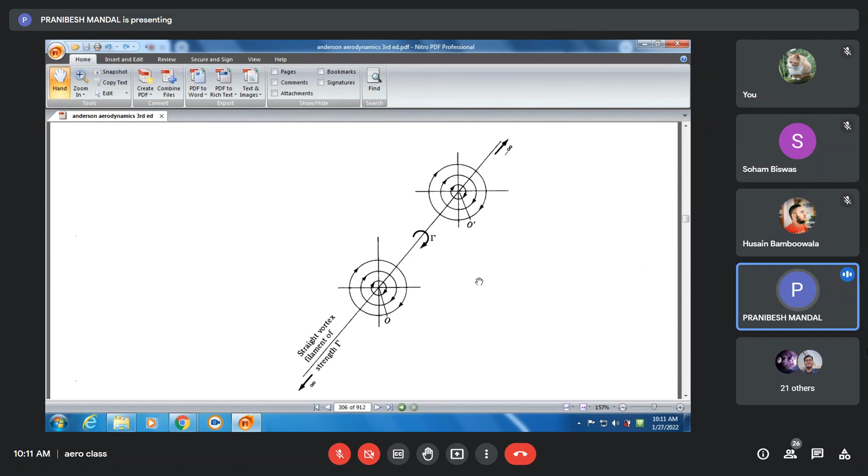Now, there was a typical question at the end that, sir, in the mathematical sense, we are saying it is inviscid fluid, but in experimental and practical sense, we know that without viscosity, such eddy generation cannot occur at the end of the curved surface, right? Yes, sir. So in a sense of practicality, what we are saying is that for an aerofoil like this curved surface, the upper surface is having a separation. That is why at the end there is eddy generation, right?

Yes, sir. And from our perspective of streamline, we noted it in another way, that the lower surface streamline is required to bend like this. That is why this eddy generation, right? Yes, sir. In a sense, if I admit both things, mathematically and in streamline perspective this is the case, and in practical perspective, due to viscosity, such boundary layer formation occurs and such separation occurs. Separation is also a streamline theory kind of thing. What happens is actually reversal of velocity from zero to negativity, yes or no? That I actually told you at the onset of that discussion.

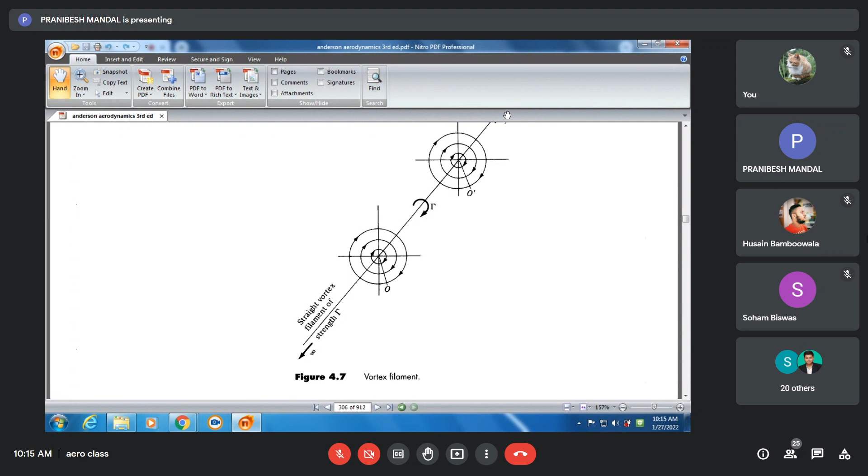Now let us get to this particular theory of aerofoil. First of all, the circulation on an aerofoil can be thought of as a series of small circulations along the aerofoil surface. Got it or not? So please repeat the last part, sir. The total circulation on an aerofoil can be thought of as a combination of a series of circulations...

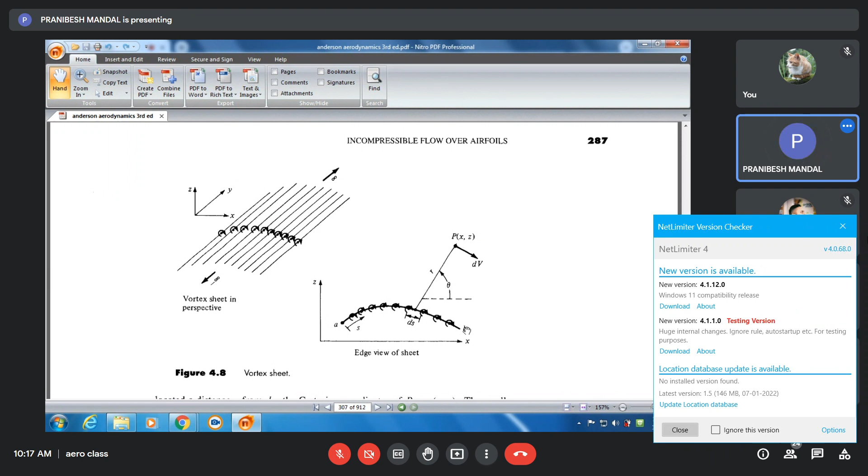Am I audible? Yes, sir. Okay, sorry, my connection got disrupted for a moment. What I was telling is that the total circulation on the aerofoil surface can be thought of as a series of small circulations along the aerofoil surface. Combination of all these small circulations will give the total circulation. Got my point? Yes, sir. That is understood, sir. But you said something about the strength also. How can we determine the strength of the small vortex? Coming back to that particular thing.

And as now we are all thinking about the 2D phenomena, so we make it in this way, that in the span direction, that particular thing is actually up to infinity. So that is a cylindrical kind of thing. Anyway, that is not very important. So we can actually take small 2D circulations which are along the surface of the aerofoil. Okay.

Yes, sir. And all these small circulations are actually combining to have a total circulation around the aerofoil. Can we think in this way? Yes or no? Yes, sir.

So from there comes a theory. Mind it, it's a very important theory as far as aerofoil characteristics are concerned, and that is called the thin aerofoil theory. What is thin aerofoil theory? I'm showing you the cross section of aerofoil again and explaining it. How an aerofoil looks like - it had an upper surface, a lower surface, a particular thickness, and a camber, right? Yes, sir.

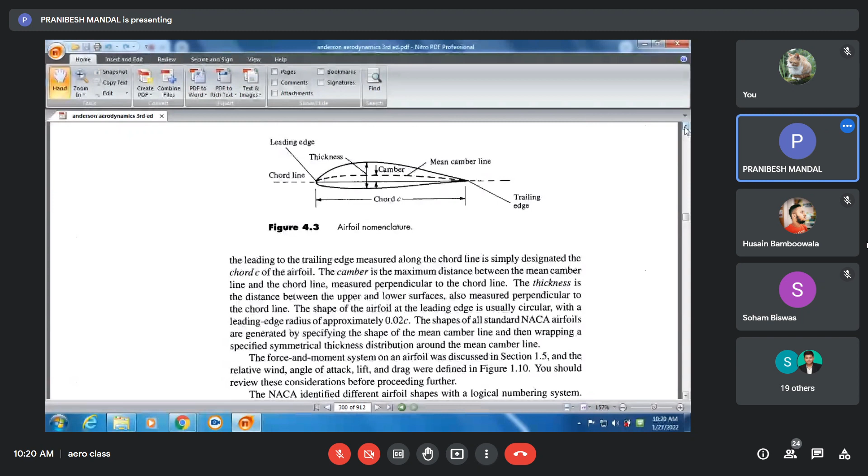Now what do you think - if I actually go on lowering the thickness, just lowering the thickness, then at one point this particular aerofoil will become a small strip along the camber, yes or no? Yes, sir. Correct.

So we say that we can take the mathematical analogy of any aerofoil as a very thin aerofoil along its camber. Understood, right? Yes, sir.

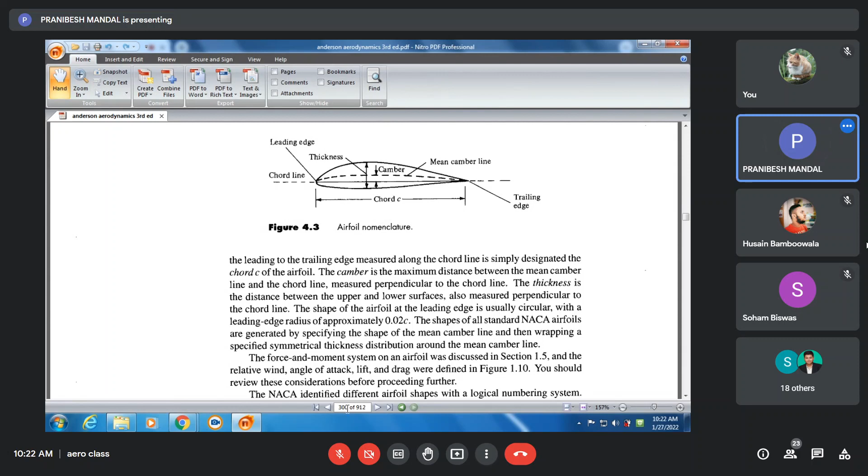Because if I take only the upper surface or only the lower surface, that cannot represent the aerofoil at all, because the asymmetry in the aerofoil is a very important criteria, right? Yes, sir. And that is why we take a very thin aerofoil along the camber line and say that it represents this particular aerofoil. Got it? Yes, sir, that is more or less relevant in order to represent this aerofoil. So we are taking a very thin aerofoil along the camber line, okay?

And as already specified, in the span direction they are infinite, so we are not considering that particular direction - we are only considering this plane.

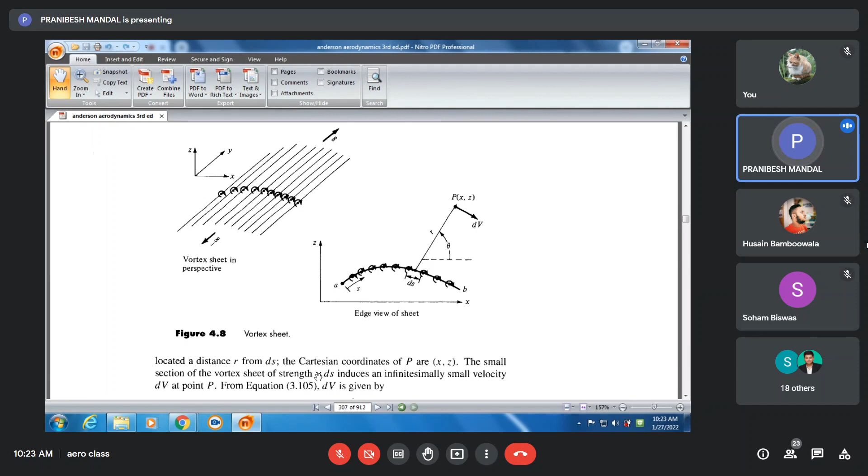And we are considering that there are very small vortices of strength small gamma per unit length. You need to understand this well. The strength of the vortex per unit length is small gamma. Got it or not? The total strength is capital gamma, but small gamma is the strength of the vortex per unit length. Got it?

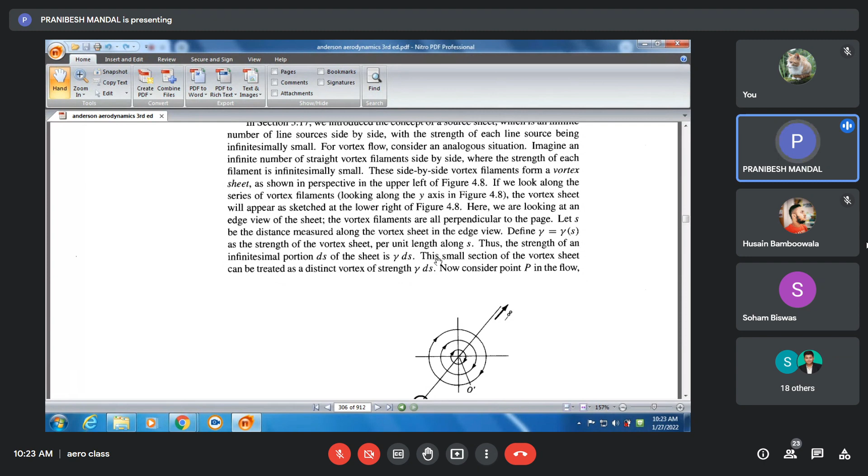Yes, sir. So again, calculus will come to help us. For a very small portion ds, the total strength will be gamma into ds, right? Yes, sir.

Now if I say that this small portion of the total vortex, that is gamma into ds, is inducing a very small velocity dv at a point p, which is a distance r from this particular section, I can say...

Yes, sir... I'm not able to understand it. Yes, sir. We can say that.

And what will be that particular velocity? As we know, the velocity induced in the tangential direction at any point is given by gamma by 2 pi r, right? Correct. Yes, sir. In the negative sense - and the negative sense is alright because that's not a problem, it's only giving the direction. I have no problem with it.

So ultimately, as the total strength is small gamma into ds, this dv will be small gamma ds by 2 pi r. This is common, and be sincere that this is dv because it is induced by this very small portion of the vortex. Nothing from the other side has had any effect on it until now - only this portion has induced this dv.

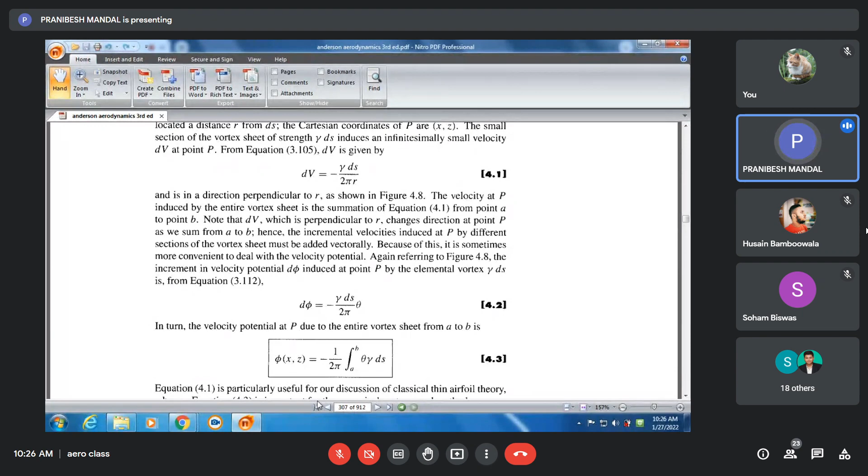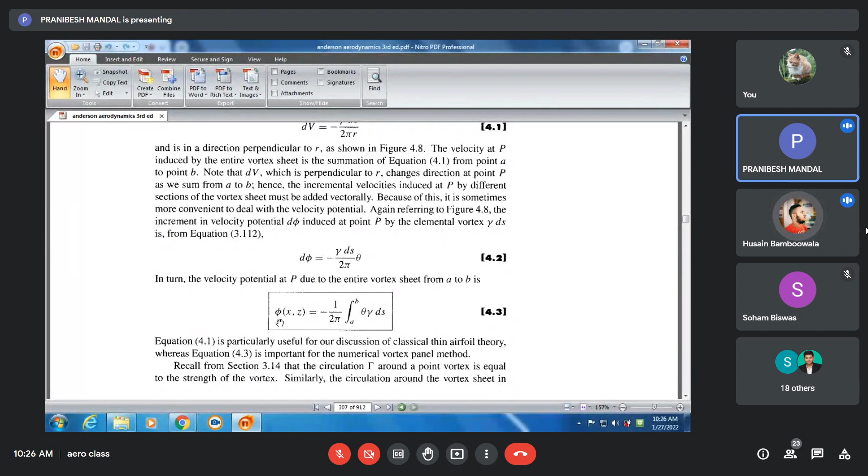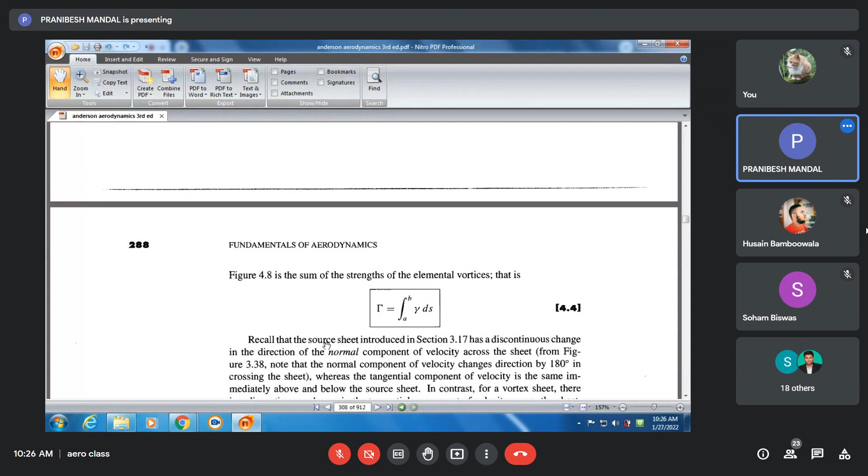Now you may tell me, sir, how can we do this particular integration? Obviously, if you are provided the geometry of this camber line and all these things, you can carry on the integration; otherwise not. But still, in this way, we can find the phi of this particular flow, right? Yes, sir. Anyway, now forget about phi, come back to v. What is the total gamma? That is obviously the integration of gamma ds from the leading edge to the trailing edge. Yes, this is very much obvious.

Correct. Now see this particular thing - we are taking gamma as its definition. First of all, let us take a closed path or a contour around this particular aerofoil strip. We can take it.

Yes, sir. We are taking this very small length ds. Obviously, you can ask me, sir, if the curved line is ds, how can this be ds? As this is a very small portion, the curvature we may omit, and we can say that the horizontal length is also more or less ds.

Yes, sir. And we take a very small normal length dn. Sir, if we say ds, due to the very less curvature, can be taken as a straight line, why will there be a variation in velocity u1 and u2? In that case it will be same. Wait, u1 and u2 are at dn. We are taking a normal small length also, and that is why we are considering that here the velocity is u1 and here is u2.

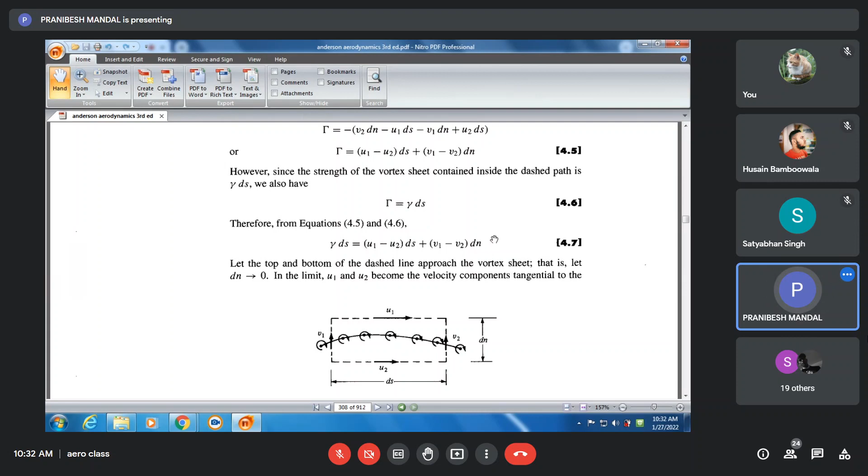Now you tell me that in the limit dn tends to 0, U1 and U2 become the velocity components in the upper and lower surface of this very thin aerofoil. Yes or no? Correct. Yes, sir. So if dn is tending to 0, what is the value of gamma? U1 minus U2. Yes, sir.

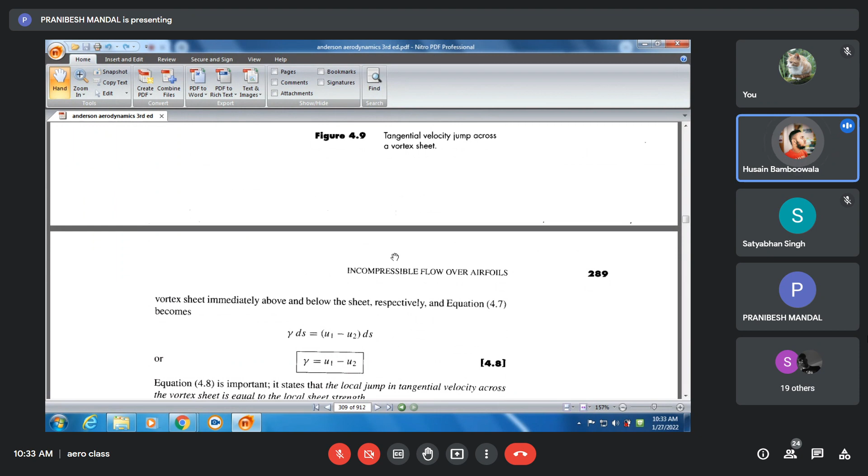Now see guys, so the small gamma is actually given by U1 minus U2. Does it say anything? Sir, the difference in velocity is basically the reason for circulation. So it is the difference in tangential velocity from lower and upper surface, right? Yes, sir.

Now, this is not given in the text. You just questioned me, that is why I am answering. Now forget about this small strip. It is correct now that the difference in velocity in the tangential direction, like U2 and U1, they give this small gamma.

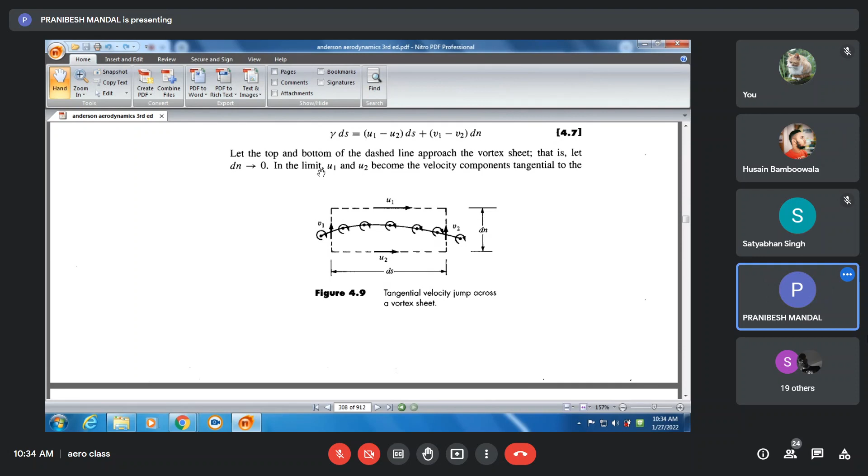Correct. Yes, sir. Think about viscosity now, how a viscous fluid is actually behaving. On the surface velocity is 0, then velocity is increasing, yes or no? Correct, sir. So there are differences in tangential velocities from one layer to another. Yes, sir, exactly. And what we are seeing is that it can be given by the local circulation per unit length, yes or no? Yes, sir. So got this analogy?

Over there, it was just for a layer without specifying the thickness. Here we have given the thickness. Can you repeat? The last thing was not coming very clearly. In that case where we were considering the boundary layer flow, we had only one surface, so we did not consider the thickness of that surface. But here, that is absolutely true.

But even if we think of that, see, here we are considering an aerofoil surface, right? Even if we didn't consider it, if we would have considered only this contour over an aerofoil surface, would it make any difference? Tell me. Has this particular aerofoil surface come into picture in any way in this analysis? I can take this contour anywhere, na?

Anywhere. That will again be equal to gamma ds. So again, our derived result is u1 minus u2 is equal to gamma. But the thing is, sir, how do we assume that with respect to ds, u1 and u2 do not change? With respect to the tangential direction, means with respect to the ds direction, the u1 and u2 do change.

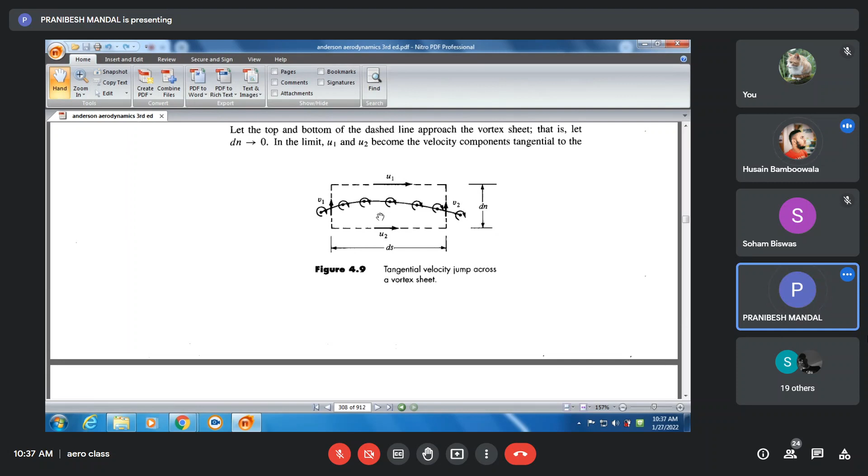And if we think the small aerofoil is there, this small gamma is actually telling the difference of velocity between the upper surface and lower surface. Yes or no? Yes, sir. So got the small gamma analogy with respect to vorticity as well as with respect to small aerofoil theory. Yes, sir. Okay, fine.

So again, one thing I got confused, sir. In the previous day, before closing, you had shown a diagram where on one side the end of the aerofoil was a triangle pattern and the other side it was a sleek pattern.

Coming, guys, coming to that only. You need not worry. See, here the aerofoil approximation is shown that we are considering a very thin aerofoil and we are taking the vortex sheet on the camber line like this. Anyway, I am coming to that particular thing only.

So for the trailing edge, first of all, let us consider the camber trailing edge only. We are seeing that the upper and lower surface velocity should be equal, right? Yes, sir. So where we conclude is that the local gamma at the trailing edge should be 0. Correct.

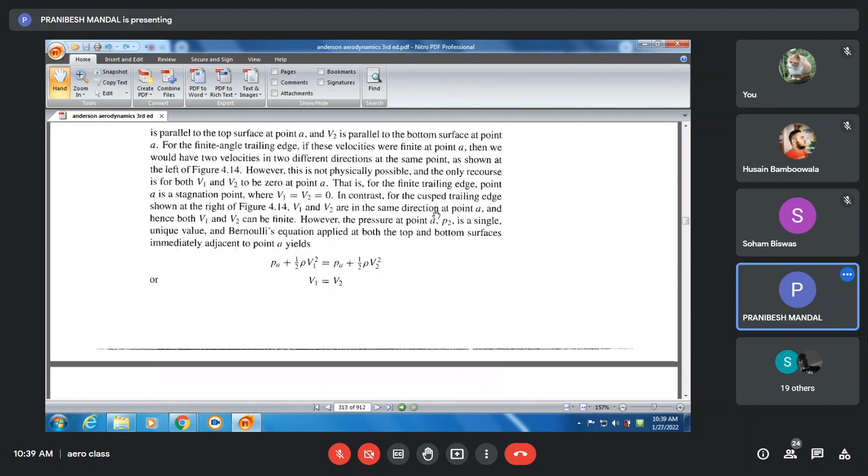If the trailing edge angle is finite, then that should be a stagnation point, as I told you, because the two streamlines cannot cut one another. Yes, sir. And if that is cut, there V1 is equal to V2. So the last two can be combined. What we say, the Kutta condition in, wait, I think you know that.

These three particular conditions are summarized and called the Kutta condition, because this particular thing was actually observed by the scientist Kutta, our very well known Runge-Kutta, the same Kutta. Okay.

And this, my particular question, bolo? So my question over there was, if at the trailing edge the local circulation is zero, then how do we get, recollecting the previous day's thing, like flow over a cylinder and then extending it to aerofoil? So then how will we get those starting vortex and everything?

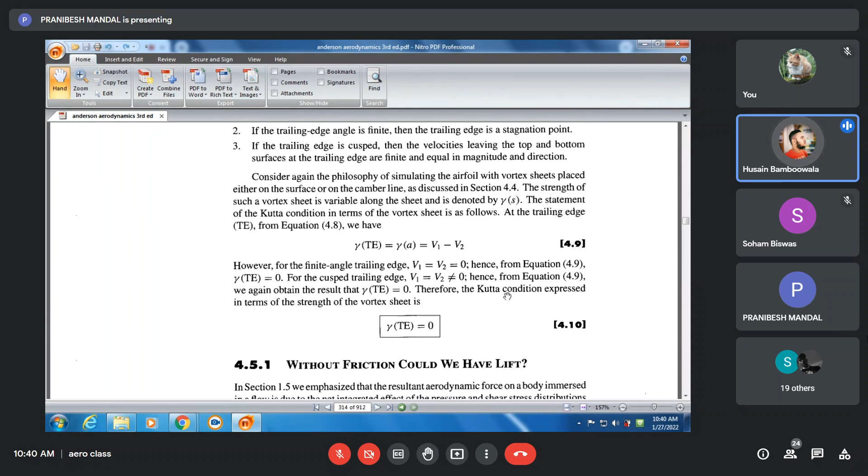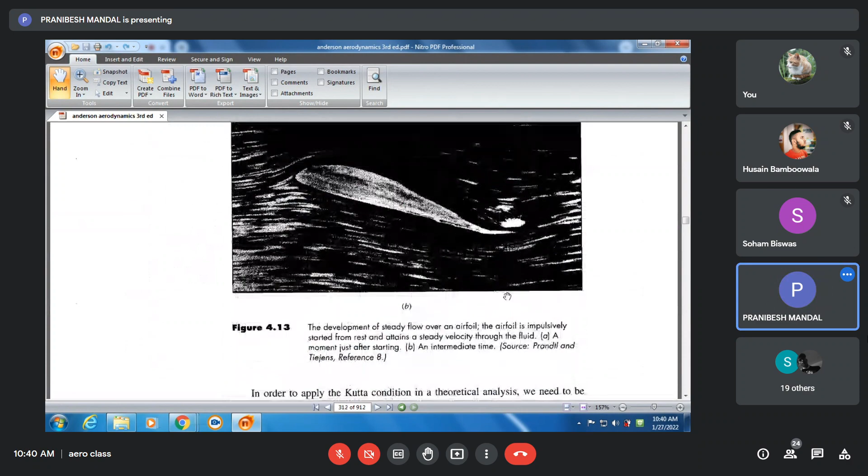So this particular condition V1 equal to V2, that can be taken in a way that gamma at this trailing edge is 0. Is it clear to all? Can you repeat once more?

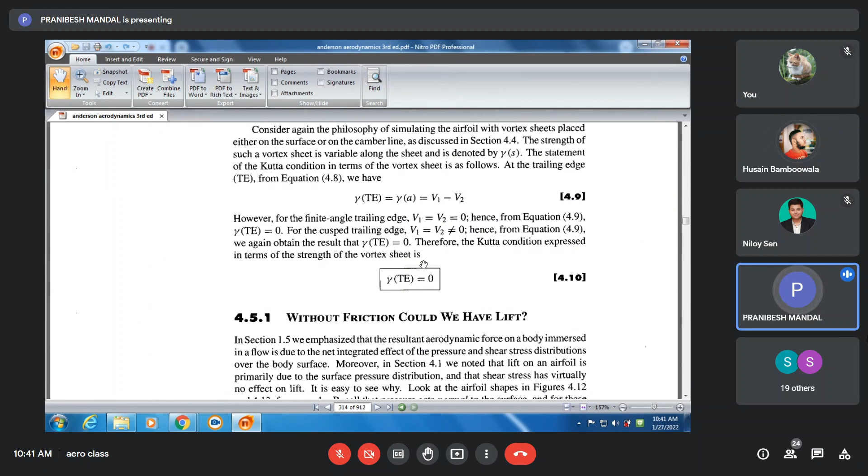I mean, if V1 equal to V2 equal to 0, then the velocity in the upper and lower surfaces are 0, and that is why the gamma at trailing edge is 0. Correct. Is this clear to all, yes or no? Yes, yes, sir. Okay, fine. Now I am coming to your point.

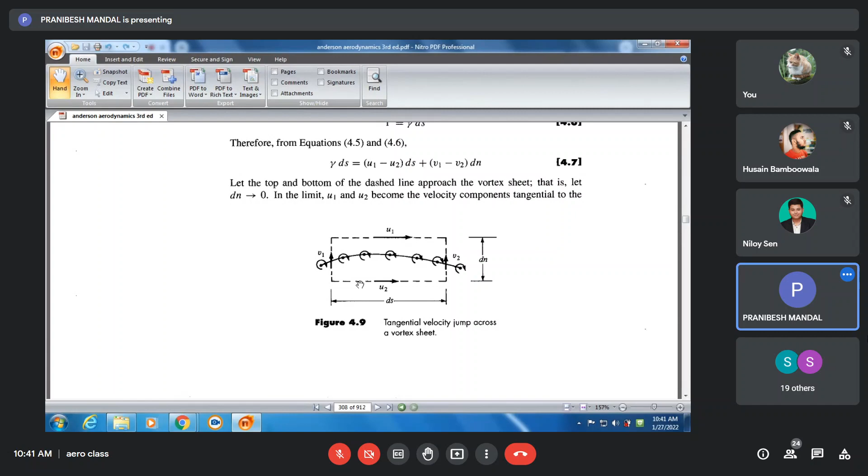You see, we have taken a vortex sheet, right? For this particular integration, a boundary condition, isn't it? We have taken gamma ds from A to B, right? And the boundary condition is telling that at point B, gamma is 0.

Got it? You need boundary condition in order to resolve it. Yes or no? And that boundary condition is giving gamma trailing edge is 0. There is no problem in it.

We have taken gamma along this particular A to B. That never says that at the end it cannot be 0. We have not told that this gamma is not changing from here to here. That is why I have taken a gamma at this particular local point. That is a variable ultimately, isn't it?

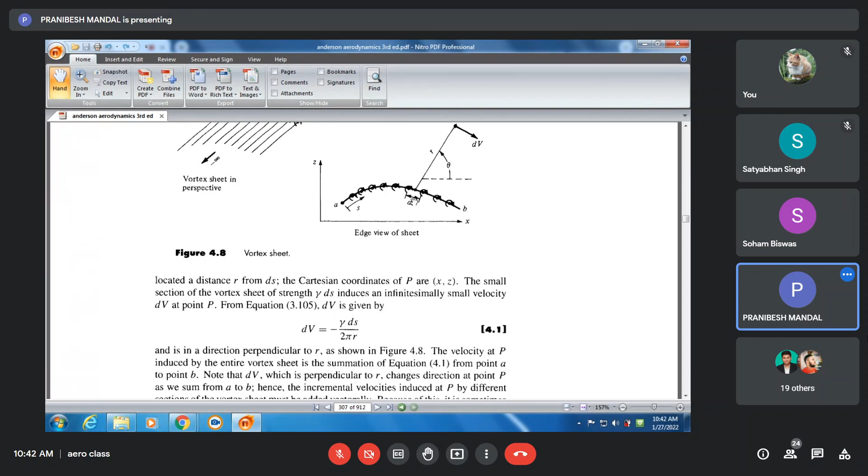Okay, so can I proceed further to the small aerofoil theory or thin aerofoil theory? We can.

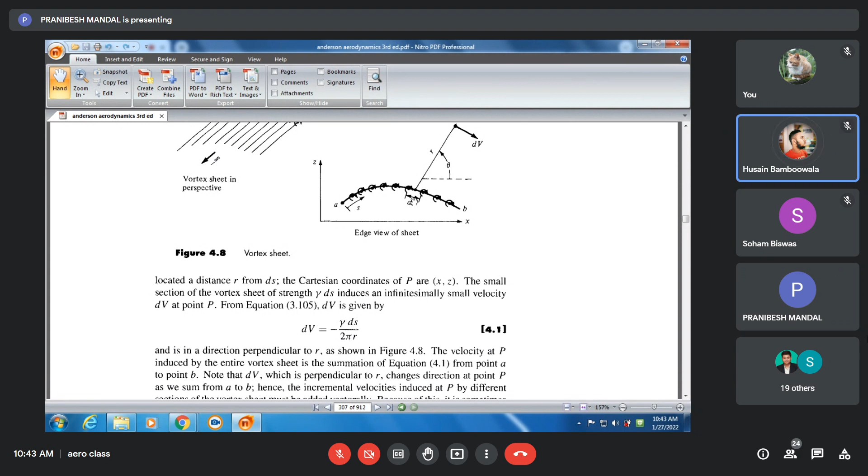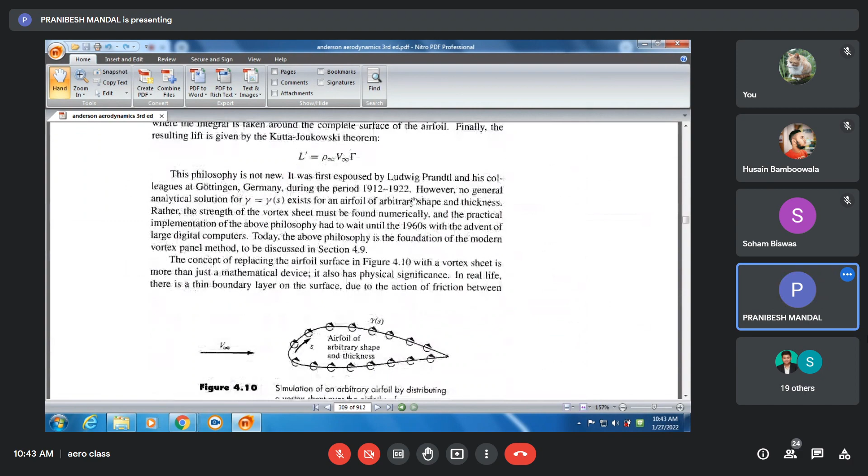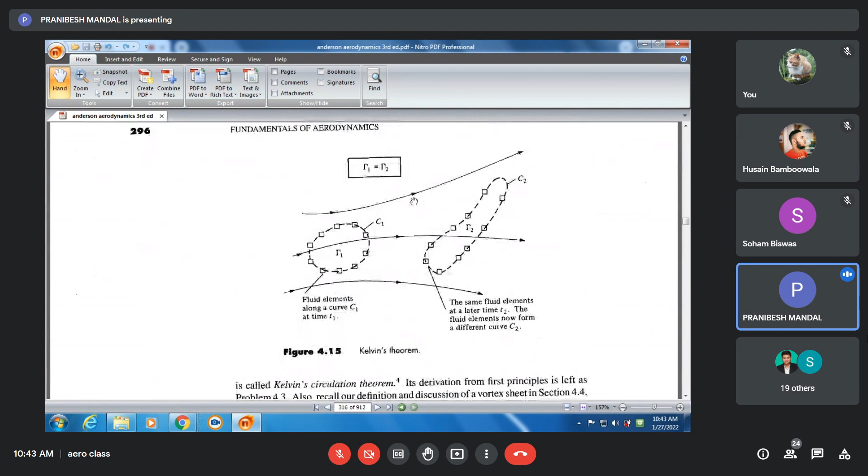So the classical thin aerofoil theory, we start with a symmetric aerofoil at the onset. And our conditions are that gamma trailing edge is 0. And also, now the camber line is the chord line, yes or no? Correct.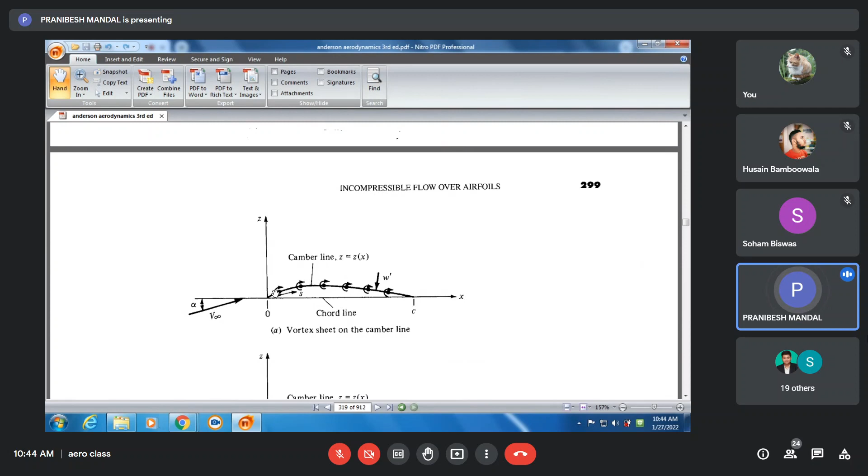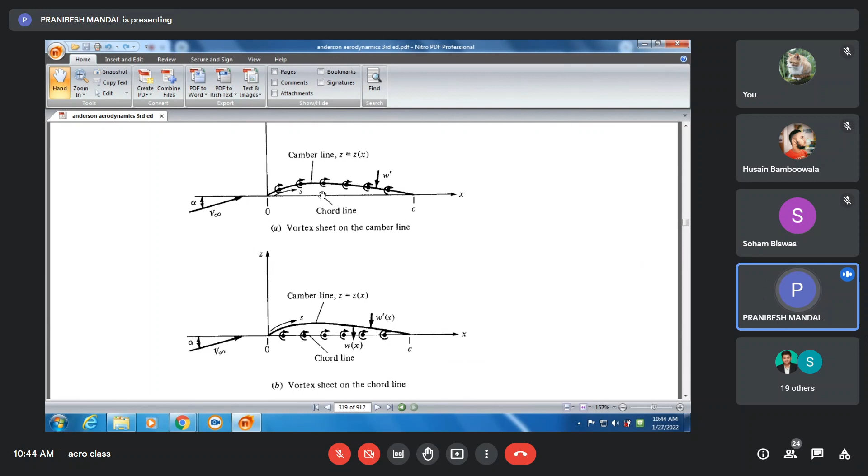So, at first we start with the camber line and we consider all the particular things are on the camber line. Then we consider that for symmetric aerofoil, or for an aerofoil with a very small asymmetry, the camber line and chord line are almost equal, right? So we can think of this particular vortex sheet is on the chord line instead of the camber line as well.

Okay, fine. So there is one V infinity at an angle of attack of alpha, and we are considering a vortex sheet of gamma ds along the camber line, which is or will be assumed as on the chord line in case of further analysis.

Now see, can we say that the upper surface and lower surface both are streamlines? Yes or no? Because now the flow is smoothly entering the aerofoil and smoothly leaving the aerofoil, so the upper and lower surface are both the streamlines.

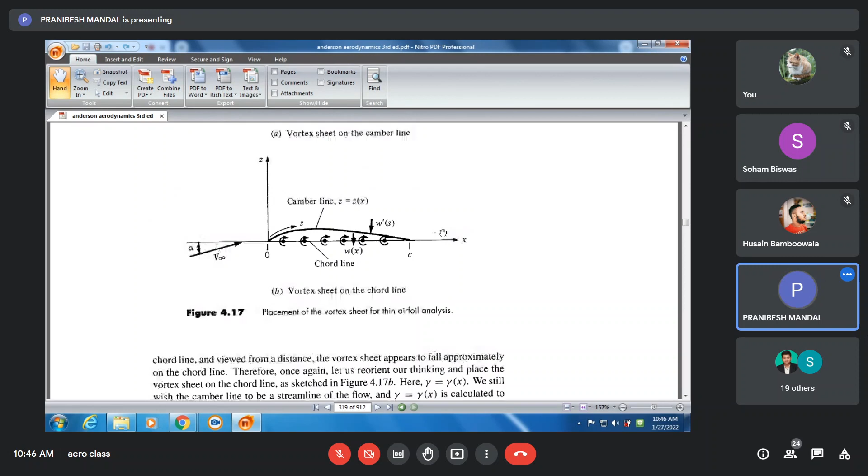And across the streamline, can we have any velocity? Normal to the streamline, the velocity is zero, right? So if normal to the streamline, the velocity is zero, then we can say that how many velocities are there, guys? One is the component of V infinity, and the other is the velocity induced by this particular vortex flow. Yes or no?

So what is the velocity induced by the vortex flow? That we consider W dash.

Sir, but why is W dash pointing towards the normal position in the first diagram? W dash is not always like this. W dash can be this, but there is one component of W dash here also. Yes or no? But that has to be zero then.

Please continue. So basically, we are taking circulation as gamma is equal to u1 minus u2. So both have the direction along the tangential direction for a very thin... that arrow is all right. But if we consider the vortex here, this will have a W dash here. Yes or no?

You are considering from here. I am considering from here. These will have a W dash here or not? Yes, sir, it will. Convinced?

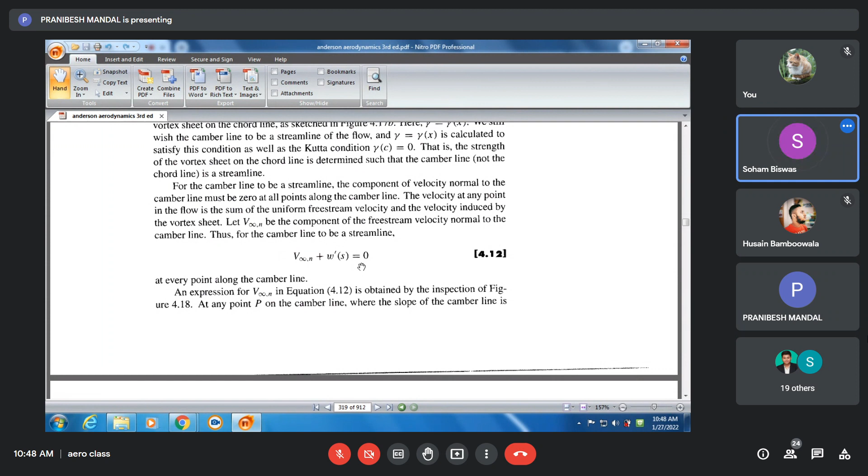We are just having a component of V infinity along the normal direction, that is my V infinity n, right? And the normal direction will depend on the contour of the camber line. Yes or no? Correct, sir.

Okay, fine. So as per the contour of the camber line, if we consider it is point P, the corresponding slant slope is tan inverse dz dx, where z and x are these two particular directions. Obviously this dz dx will be provided to you. No problem in that.

But this is the slope, right? So what is the total angle, alpha plus tan inverse dz dx, with V infinity? The total angle is alpha plus tan inverse dz dx, yes or no? Correct, sir.

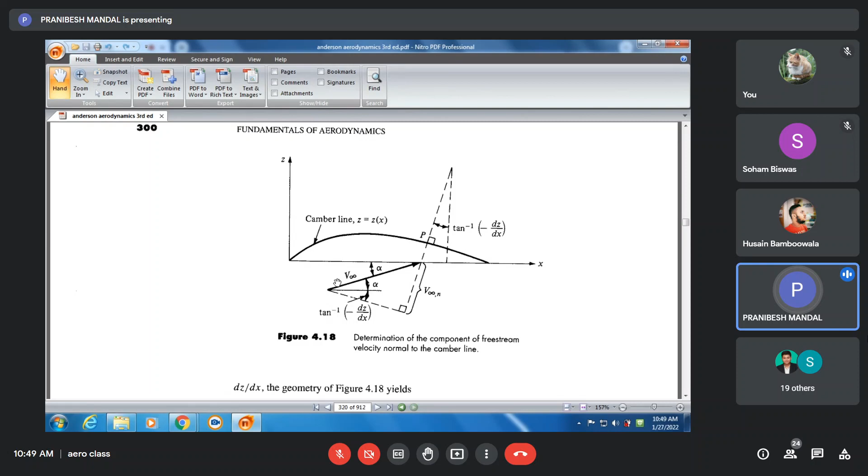So V infinity n will be given by V infinity sine of this angle. Yes, sir. Understood, sir.

Sir, you are not audible, sir.

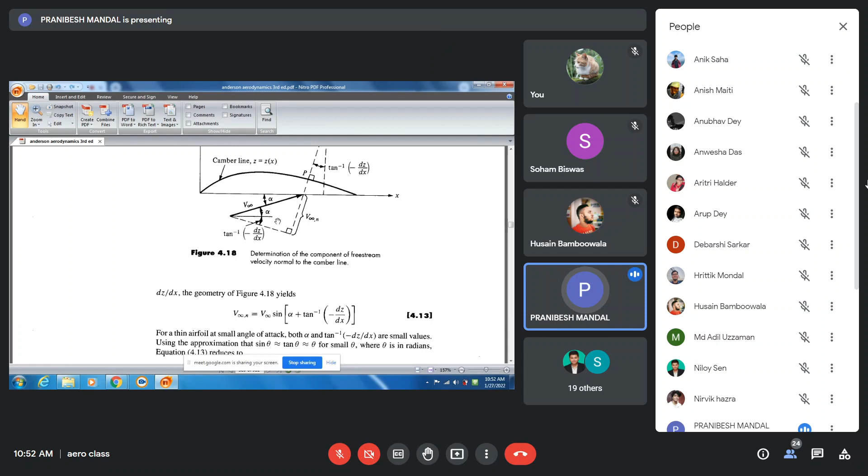For small angles, tan theta is almost equal to theta, right? Correct, sir. And also if we consider that we are considering only small angle of attack, that I will explain, but right now it is correct that the corresponding main position of this particular flight is nearly 3 to 4 degree angle of attack. So up to 4 degree also we can say sine theta is almost equal to theta.

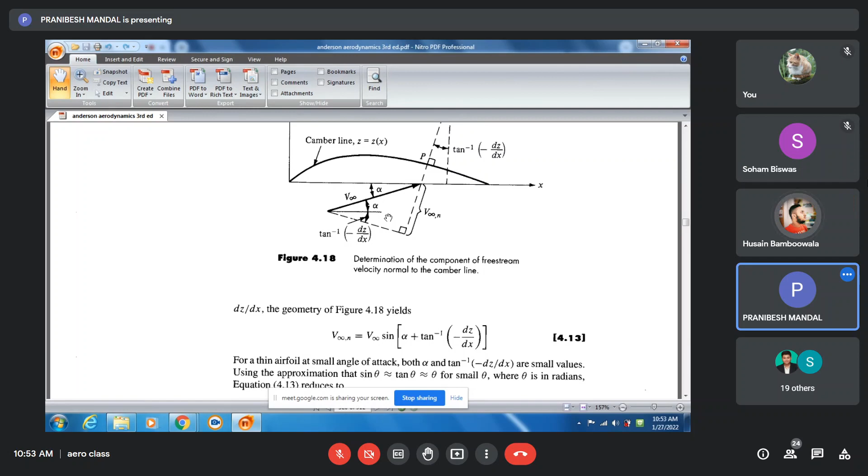We have not come to the extent of flight dynamics yet, that is why it is not totally clear. But still, so if tan theta is theta and sin theta is also theta, then this particular thing is simplified to this, yes or no? Yes, sir.

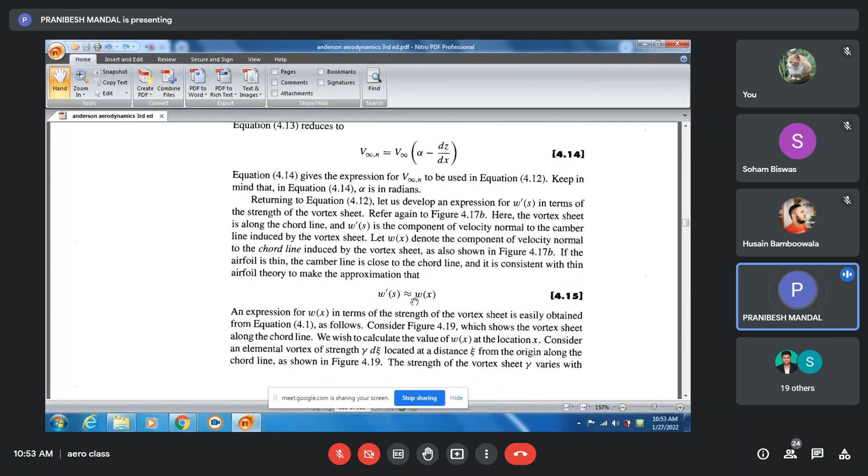So V infinity n is there. Now we must consider this W dash S, which for the case of chord line comes to Wx, right? For symmetric aerofoil, as I told you, this particular thing will come to here, yes or no? Yes, sir.

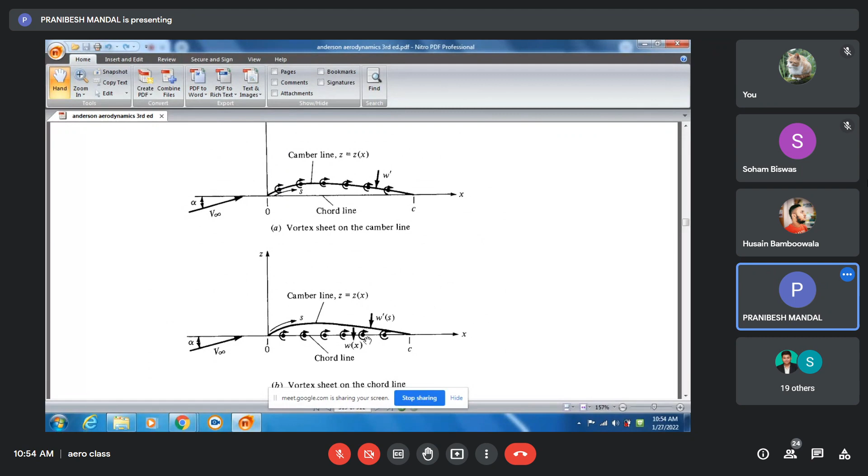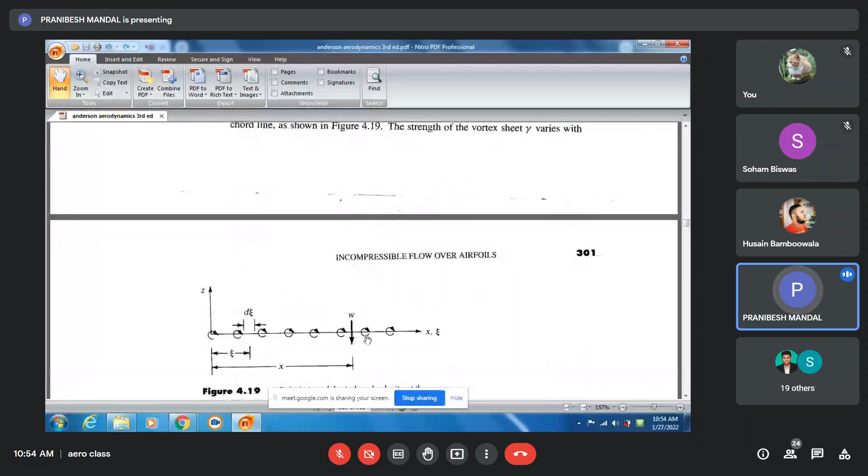5 minutes left, I am trying my best. What is this Wx? As you have already told, sir, W cannot be induced from this part only, this should be induced from this part, right? Correct. So we are having two variables, both in the same x direction: one is for the gamma and one is for the position of W.

So we consider a very small d xi that is equivalent to dx, but just in case we cannot actually make this particular thing induce W here. So we are considering this particular small circulation gamma d xi. Gamma d xi is inducing this W, okay?

Yes, sir. So what is this W? Same as gamma by 2 pi r. What is your gamma? Gamma is gamma d xi. And what is the distance r? That is x minus xi. Right or wrong? Yes, sir, right sir.

So the dW is given in this way, I can say. Yes, sir, we can, very good.

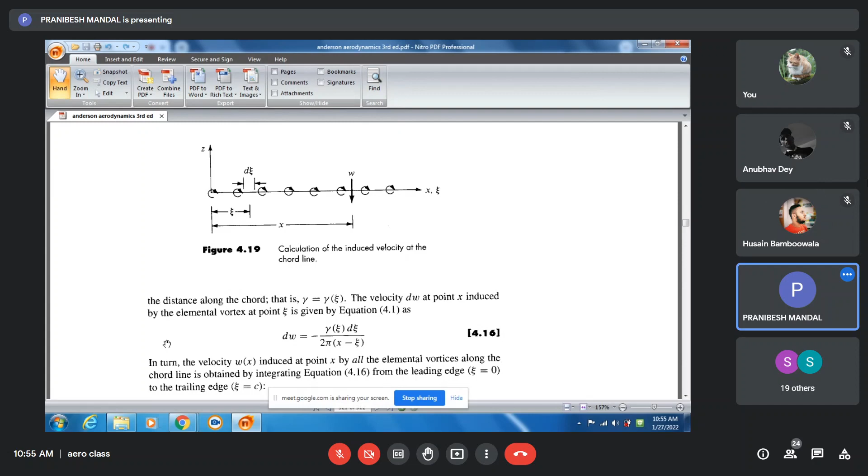So what is the total W? We must integrate it from 0 to C. Yes, sir.

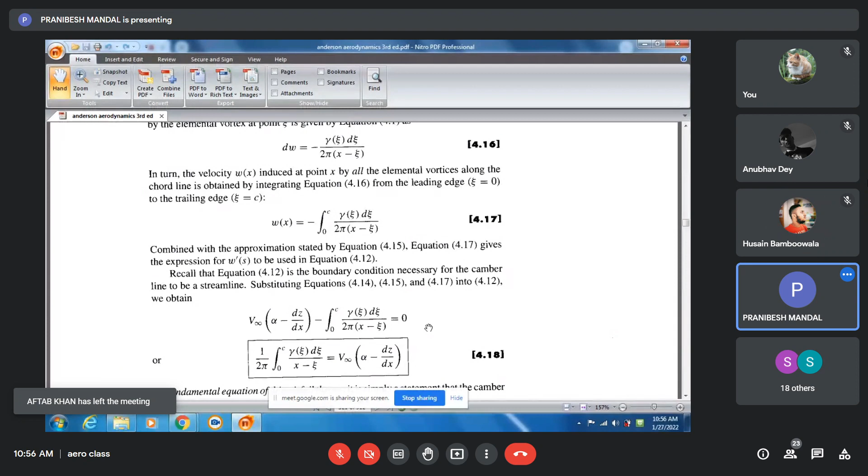Now the main question is how to get this particular integration done. Otherwise, as per our streamline theory, V infinity n plus Wx should be equal to 0. So what was our V infinity n? And this is our Wx. If we sum, that should be equal to 0, right? Yes, sir. And this we call the fundamental equation of thin aerofoil theory.

4 minutes left, should we go to solve it today or leave it? No, sir, I think we should do it on Saturday, sir. Okay, so up to this, is it clear? Yes, sir. Okay, so we are going to solve it in the next class, okay? But remember up to this.

Remember up to these guys, okay? Yes, sir. So up to the fundamental equation of thin aerofoil theory we have achieved, we will solve it in the next class.